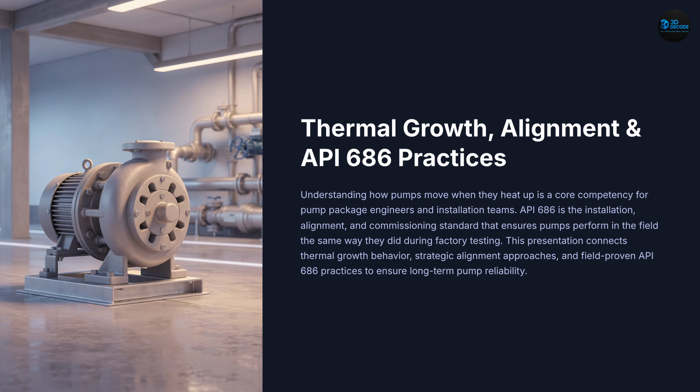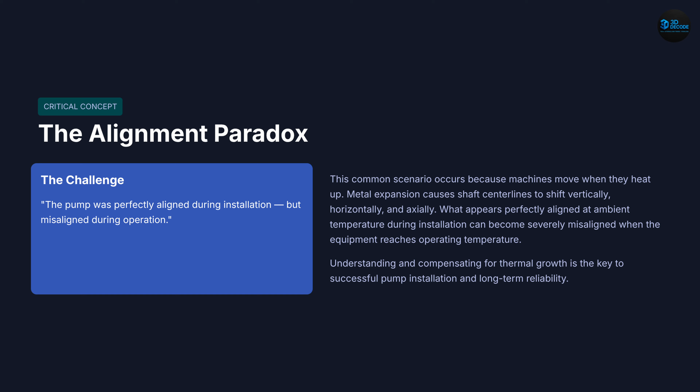Slide 1. The alignment paradox. In many real cases, a pump is perfectly aligned during installation, but becomes misaligned during operation. This happens because machines expand when they heat up. The alignment that matters is not cold alignment, it is hot alignment.

Slide 2. What is thermal growth? When pumps operate, heat from process fluid, bearings, and motor causes expansion. This expansion shifts shaft center lines. Even small movement can create significant misalignment.

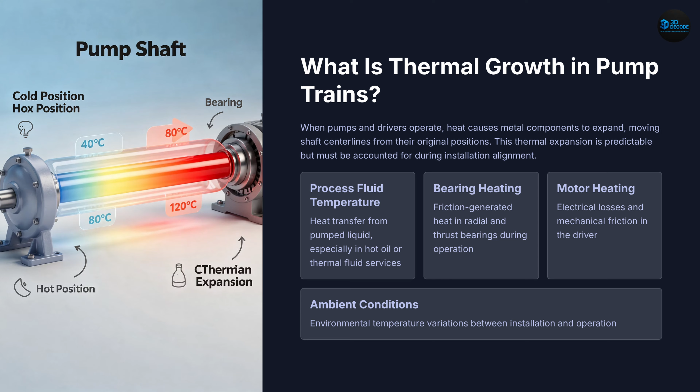Slide 3. Types of thermal movement. There are 3 types of thermal movement. Vertical growth, where the machine moves upward. Axial growth, where the shaft expands in length. Differential growth, where pump and motor expand differently. This is the most critical case.

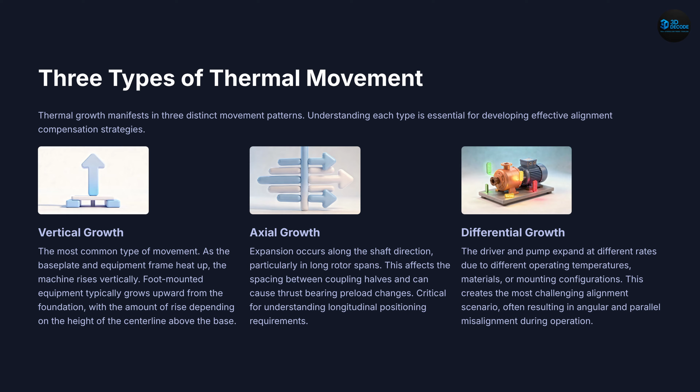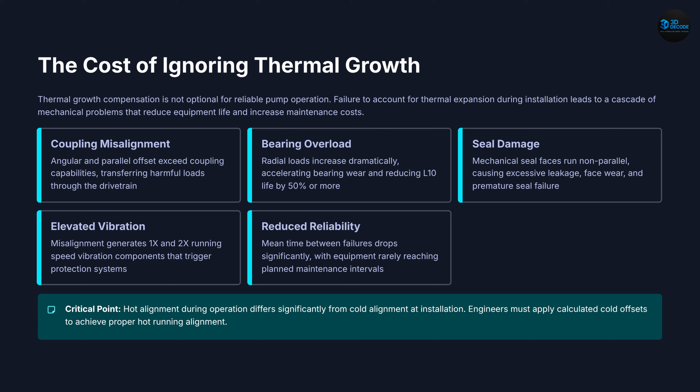Slide 4. Impact of ignoring thermal growth. If thermal growth is ignored, several problems occur. Coupling misalignment increases. Bearings experience overload. Seals fail due to uneven contact. Vibration increases and reliability decreases.

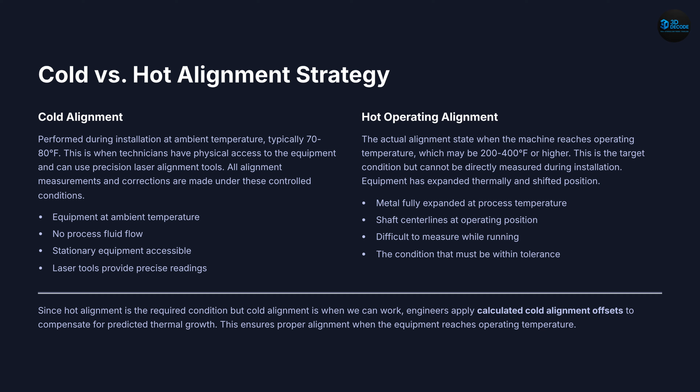Slide 5. Cold vs. hot alignment. Cold alignment is done during installation at ambient temperature. Hot alignment is the actual condition during operation. Since we cannot align during operation, we apply offsets during cold alignment. This ensures correct alignment when hot.

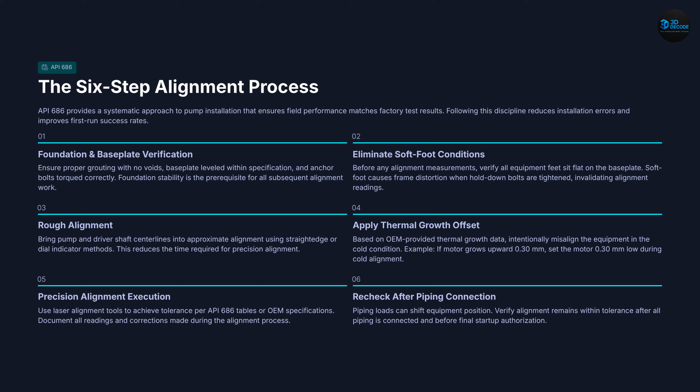Slide 6. API 686 alignment process. API 686 provides a structured process. First, verify foundation and base plate. Second, eliminate soft foot. Third, perform rough alignment. Fourth, apply thermal offsets. Fifth, perform precision alignment. Finally, recheck after piping connection.

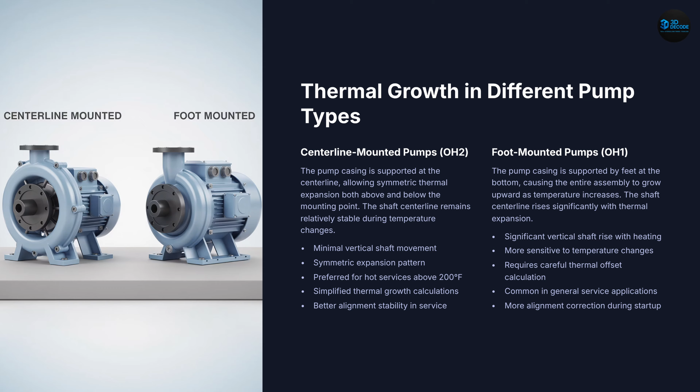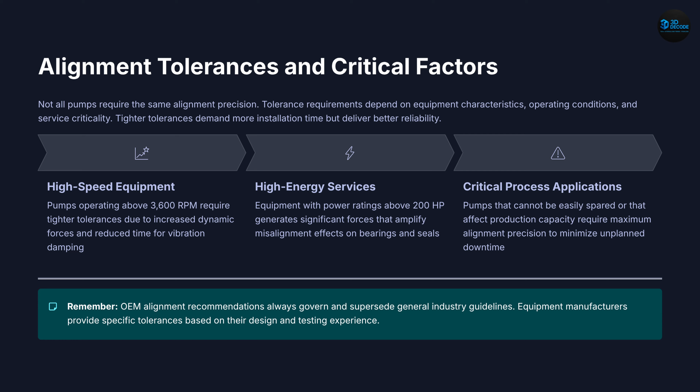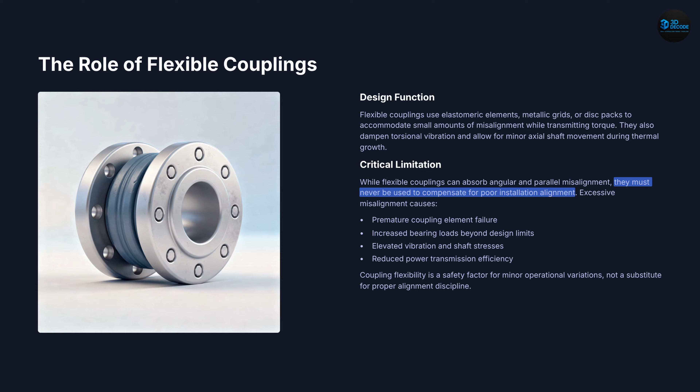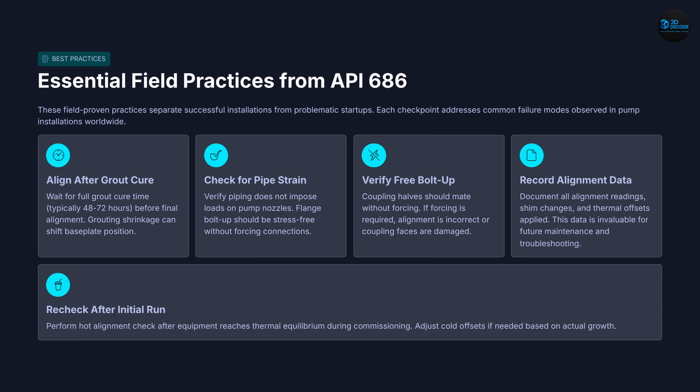Slide 10. Field best practices. Always align after grout curing. Check for pipe strain. Ensure free bolt-up. Record alignment data. Recheck alignment after initial run. These practices ensure reliability.

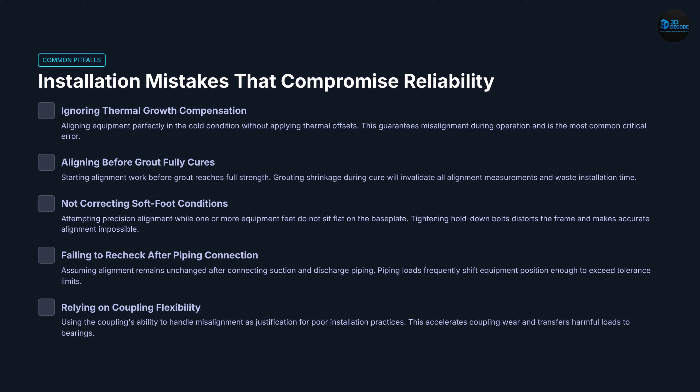Slide 11. Common mistakes. Common mistakes include ignoring thermal growth, aligning before grout curing, not correcting soft foot, and not rechecking after piping. These mistakes lead to failure.

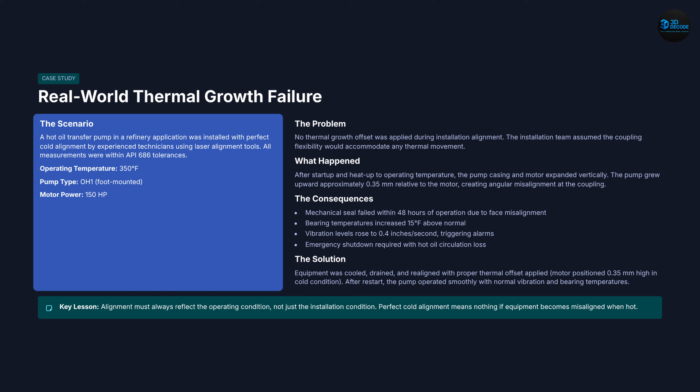Slide 12. Real case study. In a refinery, a pump was aligned perfectly at cold condition but without thermal offset. After heating, the pump expanded and became misaligned. This caused seal failure within 2 days. After applying correct offset, the pump operated normally.

Slide 13. Interview questions. In interviews, you should explain why thermal growth is important, what soft foot is, and why alignment must be rechecked after piping. You should also explain the difference between OH1 and OH2 pumps in thermal behavior.

Slide 14. Golden rule. Remember this key principle. Alignment must reflect operating condition, not installation condition. This is the foundation of reliable pump operation.

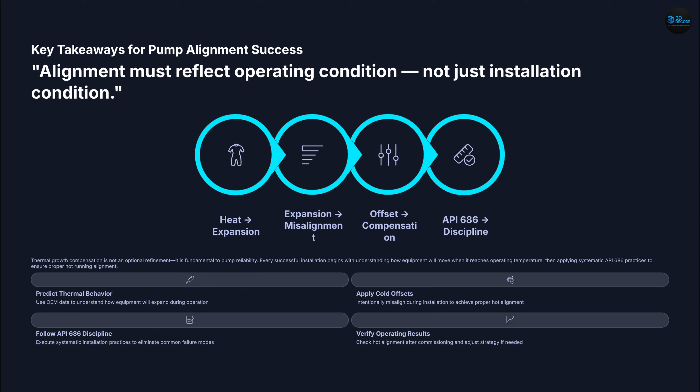Slide 15. Final takeaway. If you understand thermal growth and follow API 686 practices, you can prevent most alignment-related failures. This knowledge separates average engineers from expert engineers. If you want to become a strong rotating equipment engineer, focus on real-world behavior, not just theory.